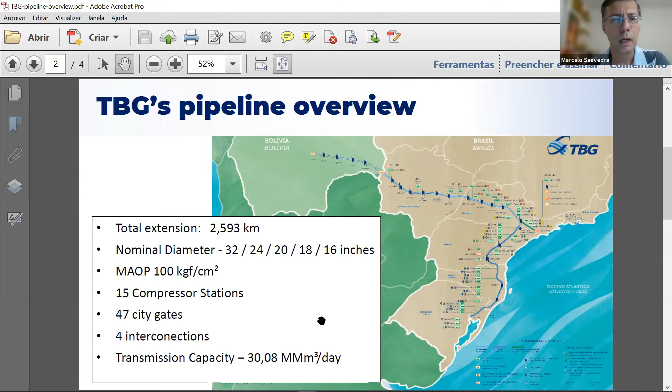And in the south, we also connect to TSB, the other pipeline operator there, and the distribution company Sulgás. Our nominal transmission capacity is around 30 million cubic meters per day. About our market area, we connect to 7 distribution companies. We serve 50% of Brazilian GDP, around 2 million residential consumers, and 20,000 commercial consumers. We also connect to 3 refineries and 4 gas-fired power plants. That's a brief overview of our company. Thank you.

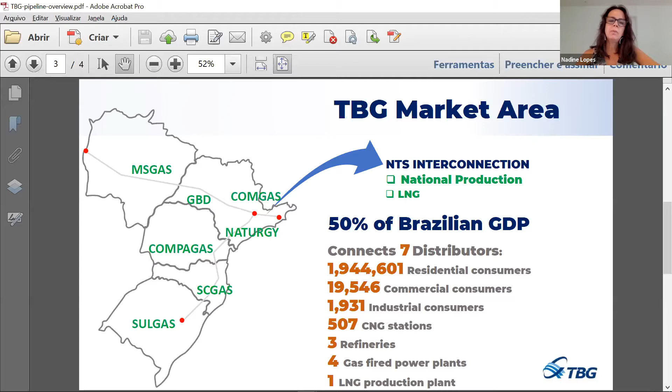It works, yes. So good afternoon to everyone, thank you for this invitation. My name is Eric Courtalon, I have been the Chief Operating Officer of TAG for a little less than a year. So just in a nutshell, TAG shareholders are Engie and CDPQ, la Caisse de dépôt et placement du Québec.

And so TAG operates 4,500 kilometers of gas transmission network, with 11 compressor stations. It's our specificity: we have approximately 1,000 kilometers in Amazonia with 2 compressor stations, and the other part of the network is along the northeast coast of Brazil until north of Rio.

And the main challenge that we are facing right now is that next year we will internalize, as NTS did, the remote operation, so that will be performed internally by TAG. We also have a lot of projects of innovation, transformation of our processes and activities on the field to improve our performance. So just to conclude, thank you for allowing this exchange, because for us it's very important in a context of, on one end, gas development in Brazil, and on the other hand, a technological revolution that allows us to live a period of exciting transformation.

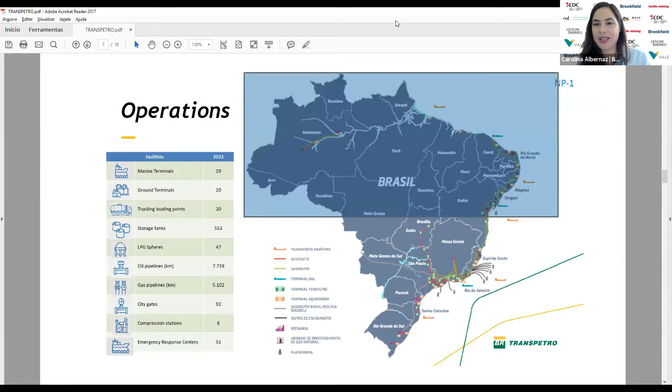Thank you, Carol. Thank you, Nadine. It's a special pleasure to be here today. Good afternoon everyone. Just a second, just let me share my presentation. Okay, all right.

My name is Marcelino, Director of Pipeline Brazil. Good afternoon everyone. On behalf of the Brazilian pipeline community, I'd like to thank all of you for being here today.

I'm talking about the Canadian companies and the Brazilian pipeline operators. My presentation today is divided into 3 parts: to talk about my present company, Pipeline Brazil, to talk a little bit about the relationship between Brazilians and Canadians, and to update all of you about the Brazilian pipeline market.

After almost 34 years working at Petrobras, I retired and founded Pipeline Brazil. Pipeline Brazil is a different company because it's an associated platform, working with young professionals and old heads. We have been developing activities, studies, trying to identify new technology in the pipeline industry, training, events, and helping startups. Pipeline Brazil is ready to cooperate with international companies wanting to invest in Brazil, or to help identify local partners to work together with international companies in Brazil.

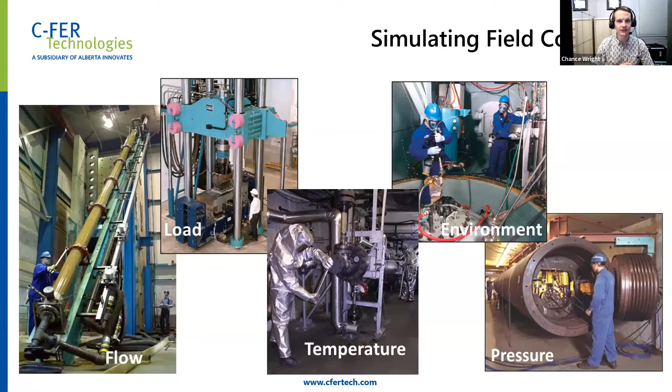Besides performing testing and related consulting work, C-FER also offers a number of different software packages. The most relevant here would be the PIRAMID Risk-Based Integrity Management software for pipelines. This software uses the latest verified probabilistic models to predict the likelihood and consequences of pipeline failure for a comprehensive suite of pipeline threats.

This allows operators to perform a number of different functions. It includes segment ranking to see which pipelines and which threats are affecting an entire network risk estimate. You can drill down to see how your risk changes over time, including the effect of maintenance actions such as defect repairs or hydro tests. You can look to see how individuals near the pipeline will be affected by failures of the pipeline, and you can get a detailed look at influencing factors into your pipeline risk by plotting a risk profile, which shows levels of risk along the pipeline route.

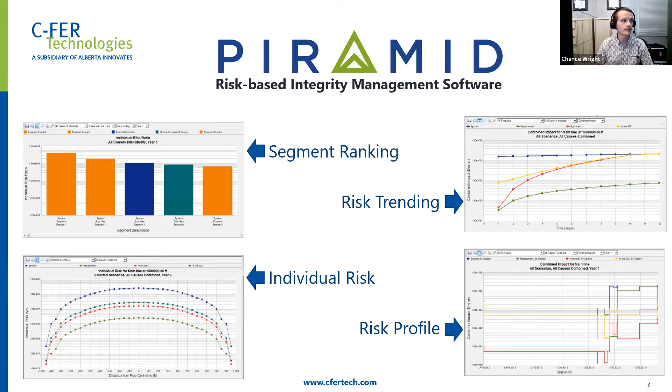Now to touch on a few of our key consulting areas related to pipelines, the first of which is defect assessment. Here, C-FER specializes in performing fully probabilistic assessments of defect safety. These assessments can include all of the different uncertainties that normally go into the defect assessment process - uncertain length, uncertain depth - performing simulations to determine the true probability of failure for each individual feature. This allows for very reliable and detailed probability of failure or remaining life calculations, which allows you to optimize the inspection or the time period required before a repair is necessary.

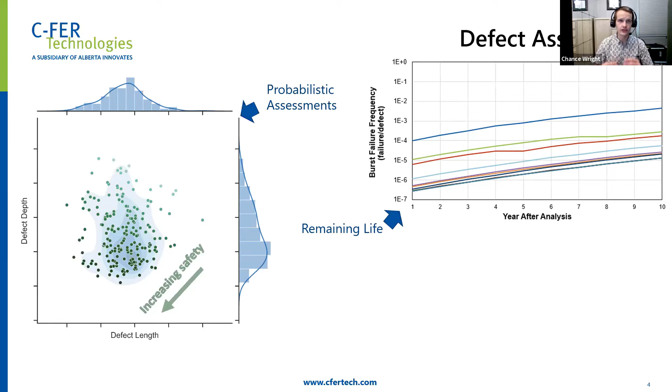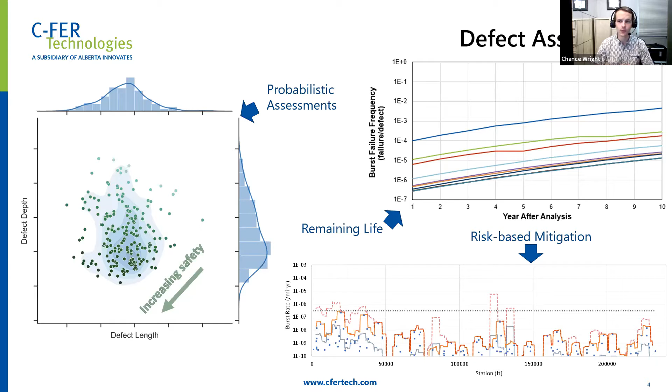All this information is used to help lead operators towards risk-based mitigation programs. This type of program allows for consistent life safety, financial, and environmental risk along pipelines, as well as between different pipelines in a network, all while optimizing the number of interventions and the cost required to perform them.

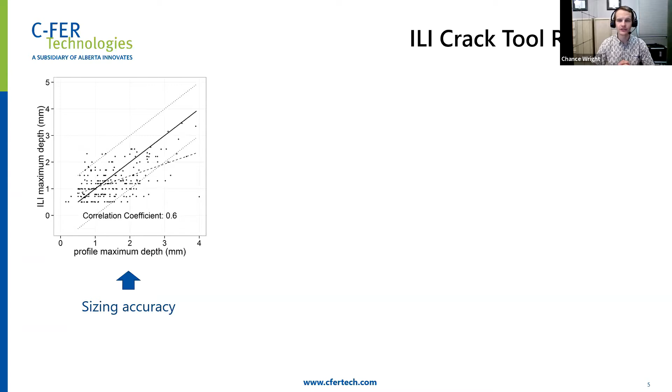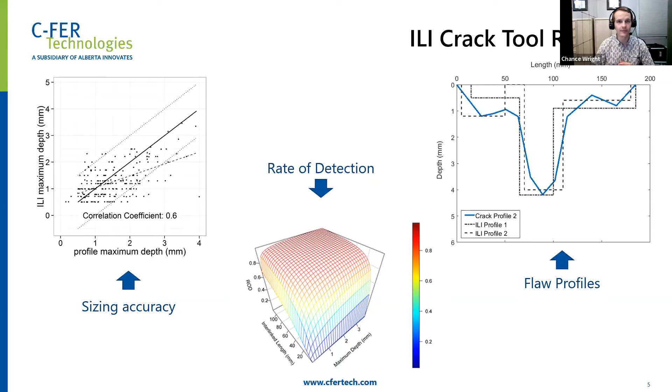Another important area of our consulting services is inline inspection tool reliability. C-FER will work with operators and vendors, or both at times, to evaluate how well these tools perform in different conditions. We are able to perform independent sizing analyses to determine how well the tool predicted the size of defect parameters for different defect categories. We can look at which parameters influence that tool's ability to detect the defect and produce rate of detection, so operators can understand which defects their inspections might be missing. Finally, for those inline inspection tools which give crack profiles, we can determine how accurate the burst pressure is when calculating using that profile, compared to using a detailed profile from an in-ditch measurement.

Lastly, I do want to touch on C-FER's leadership in managing the transition to a hydrogen economy. We've already done some consulting work to identify the gaps required to transition to hydrogen on paper, and we're also ramping up our abilities and our testing programs to suit this area as well.

This includes looking at how legacy material will perform in hydrogen-rich environments, or at least with a component of hydrogen. We're also looking to perform full pipe body burst capacity tests in hydrogen environments, as well as examining the full set of infrastructure required for hydrogen-based energy production and consumption. That includes storage wells for both hydrogen as well as CO2, and we can look at how well the casings will hold up under the conditions they will endure if put into service for this purpose.

So that is the whirlwind tour of some of the important things that C-FER is working on these days. I would like to thank you for the invitation to this, and I'm looking forward to the Q&A session afterwards.

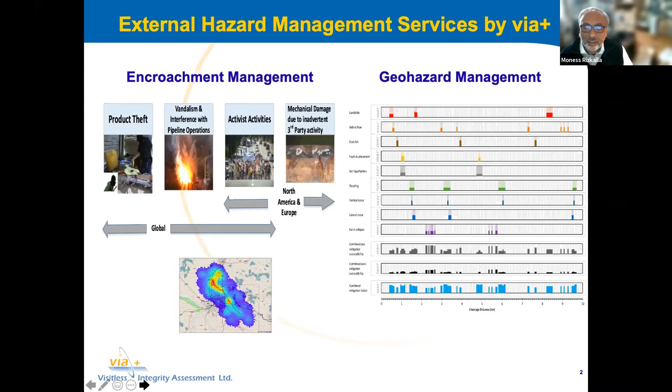And the geohazard management that we would be talking about essentially is looking at various geotechnical hazards, trying to undertake a risk-based assessment, trying to evaluate the susceptibility, which is basically the effect on the pipeline capacity, pre-mitigation, post-mitigation, and what mitigations would it take to achieve that delta.

So geohazard assessment involves identifying the various threats due to a combination of various geohazards. Several geohazards could be acting in one place, leading to various loads and deformations on the pipeline. Geohazard assessment can be used to directly manage these risks and to put them in as an input, for example, to PIRAMID, which was described earlier, or various other overall risk assessment frameworks, and to work in the spirit of various codes. CSA Canada's code is one that works well with that.

What's important here is to differentiate this and to take this beyond strictly geotechnical, geomorphological assessments. So inherent in a pipeline geohazard assessment is the capacity, the vulnerability, the resistance. And so we are looking at things, as we say, from the pipeline out, but it is really about what are the expected effects on the element at risk. We tend to mainly focus the element at risk being the pipeline.

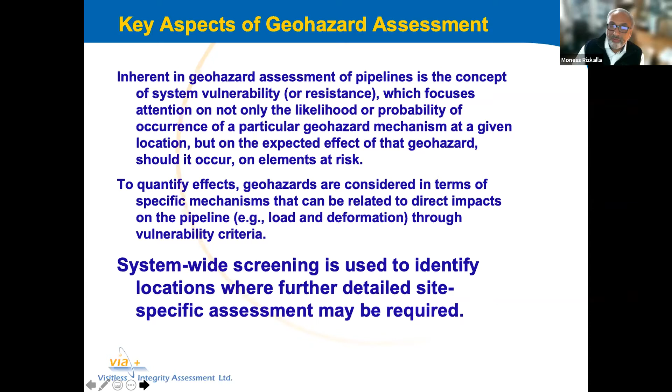So we're considering things like load, deformation. What would this particular geohazard lead to in terms of bending, in terms of torsion, in terms of mechanical effects on the pipeline? And we undertake a system-wide screening used to identify the locations where further detailed site-specific assessments may be required. So we bring data, may it be spatial data, pipeline operational data, etc., and topographic mapping, geological mapping, the wealth of monitoring data that a pipeline company operator may have had, integrate all these to identify what is at play where, and in some cases, what distinct geohazard mechanisms together are working.

I'm not quite sure who's driving here.

You may be driving. So the output ends up being an example like that. We could look at landslides, debris flow, rock falls, faults, and liquefaction if it's an area that is prone to seismic activity. Definitely flooding and vertical scour and lateral scour, the areas associated with rivers.

We divide those, and what you will see at various bars is a light color and a dark color. The light color indicates where the hazard mechanism is at play. So for example, if you look at landslides, the locations here suggest there is a slope of such and such a width, at such and such a location, that is unstable.

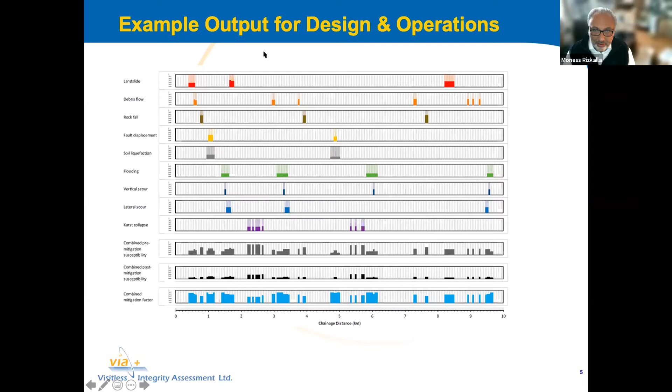However, that instability in itself does not necessarily manifest into equal impacts on the pipeline. The impacts on the pipeline, therefore the susceptibility on the pipeline, is what's identified in the darker colors for the respective hazards. So it's necessary, but not sufficient, to simply map the geological, geotechnical, hydrotechnical, and seismic hazards.

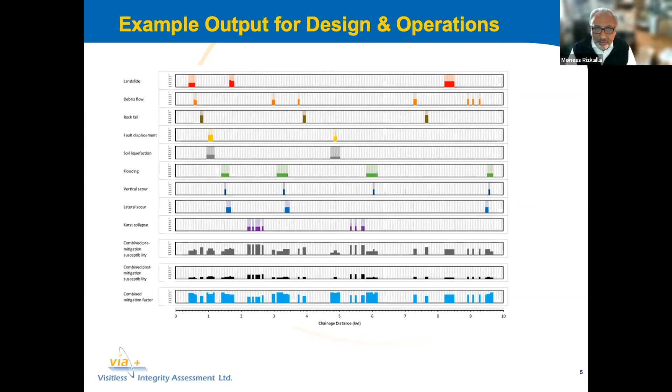Rather, we need to identify these and identify the effect on the pipelines. And then, where they are possibly overlapping, we need to integrate all those together and come up with a pre-mitigation susceptibility, basically the third row from the bottom.

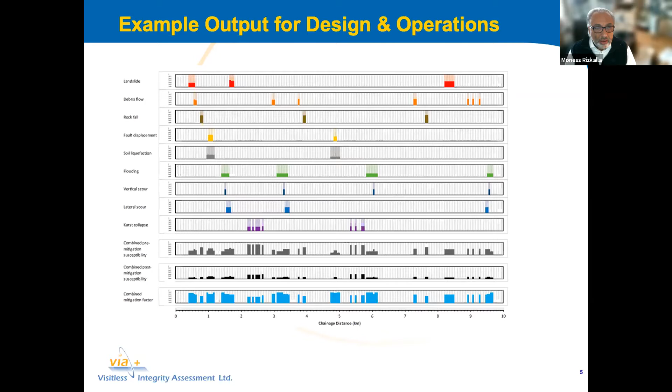And then we decide what we are going to do there in terms of mitigation. We could be doing this evaluation during the design stage or during operations. So we could increase the wall thickness, increase the depth of cover, introduce different stabilizations, or change the pipe grade, etc. Ultimately, we move from a pre-mitigation susceptibility to a post-mitigation susceptibility.

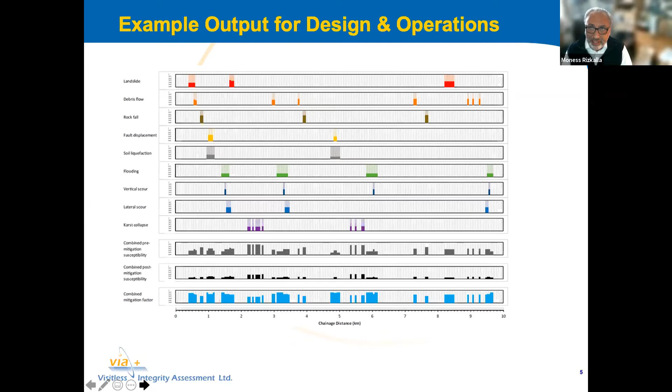That ends up being kind of the failure probability that gets integrated with consequences in a framework, like PIRAMID or someone else. And we keep track of all the mitigations we've done. Again, that could be applied at the juncture of designing a new project or during operations.

Going down to the next slide, what is the advantage of doing this? I am personally a geotechnical engineer. There are a lot of geotechnical engineers, and geotechnical engineering is a discipline that needs a fair bit of qualified professional or expert judgment.

That's true, but I think the advantage of this, and why leading operators have embraced it, is because it introduces a systematization that addresses the heightened expectations by regulators, internal and external stakeholders. Internal stakeholders would like a more controlled, predictive kind of timeline assessment, so we could predict when to plan things to avoid negative consequences—financial, environmental, etc.—due to a loss of containment event. This is becoming now a best management practice.

It is spelled out in several codes. In fairness, all the codes, whether American, Canadian, European, etc., will not specify how to do it—whether it needs to be quantitative, semi-quantitative, or qualitative. But there is an expectation to introduce some discipline and systematic approach to this. This will demonstrate due diligence and allow an analysis of the pipeline's performance over time—how much we are spending to maintain a sustained level of integrity.

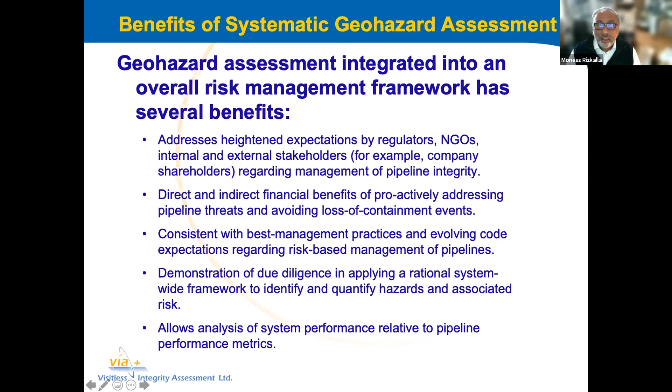And from there, it could be design, or from geohazard assessment, it could be integrity management planning. I realize this is going perhaps a little too quickly, but it just shows how the same exercise, beginning with data and applying a disciplined approach, could either support the integrity management of operating pipelines and/or the design of new facilities.

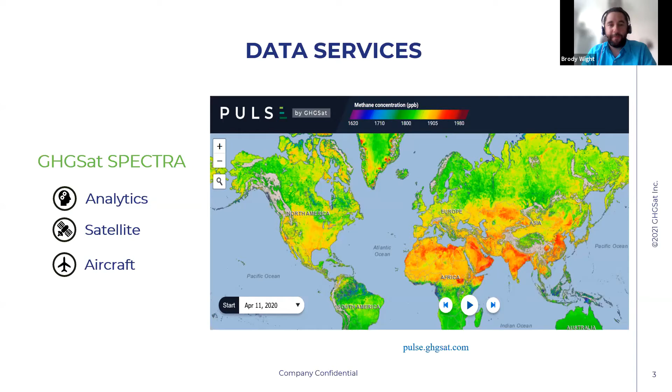So what do we provide? Essentially, data services. We have our own analytics that we've derived, satellites that we own and operate, as well as our own aircraft that are well suited to monitoring large assets such as transmission pipelines. We also have a publicly available map that I'm showing here, but this is just a brief outline of what I'm going to talk about, starting with the analytics. I'd encourage you to check out pulse.ghgsat.com to see some of the data we've made public — a teaser for some of our analytics capabilities.

So what do those look like? What I've got on screen is a map showing the Americas. You can see we've segmented the world into a variety of zones, as we call them. We provide analytics at a high level of these zones, looking at methane concentrations and trending them in those areas, using a variety of data sources, but largely based on public data.

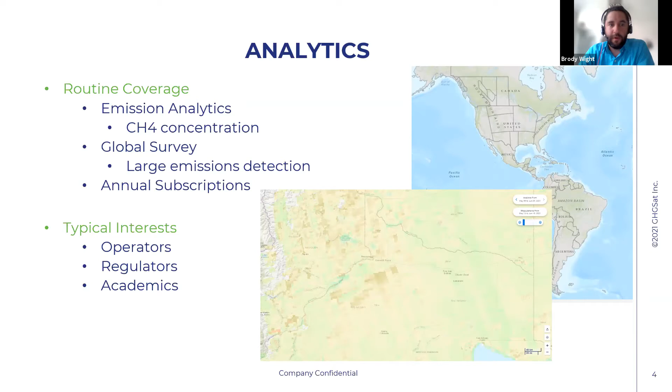We also offer analytics in the form of what we call a global survey, looking for very large emissions, again using public data sources, provided as a subscription service. We have interest and contracts with all walks of those interested in methane emissions. The example shown here, with some greens and oranges, is actually a screenshot of our higher resolution methane analytics, provided on a roughly 2-kilometer scale and updated weekly. The global survey is similarly provided on a frequent basis, acting as a catch-all for large emissions we see routinely around the world.

Complementary to the analytics offering, as our name implies, being GHGSat, we own and operate our own satellites. Our satellites are designed to be relatively small and easy to launch, and they're focused exclusively on methane. The key unique capability we have that other satellite sources may not provide is the resolution that allows for detection of emissions at the facility level — compressor stations, valving, that type of thing along the system. The contracts we're operating on today typically look at these surface pieces of infrastructure rather than the linear pipeline itself. We capture an image roughly 12 by 12 kilometers in field of view, and with the 2 satellites we have in operation today, we're able to revisit up to weekly.

We've already started on and are contracted for the launch of our next 3 satellites in mid-2022, and then early in 2023 we'll be launching another 5, with a goal of being able to provide daily coverage of any of the assets we might be monitoring for our customers.

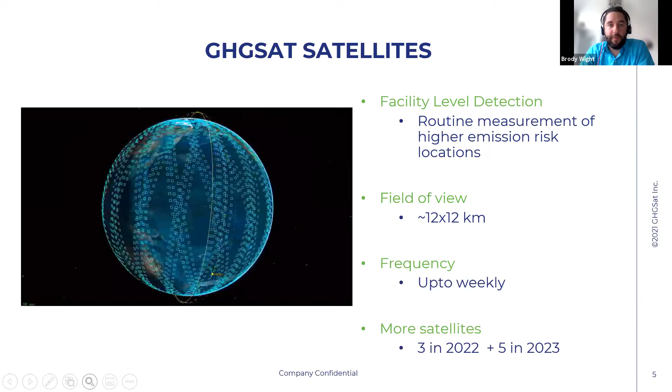A quick example of what a GHGSat data product looks like: here you see an observation we've taken, clearly identifying a source of emission at the center of that plume. We refer to this as our concentration map, and you can see that 30-meter spatial resolution that is unique to GHGSat today. We're the only operator of a satellite with this kind of spatial resolution for methane globally, and we're expanding our fleet rapidly.

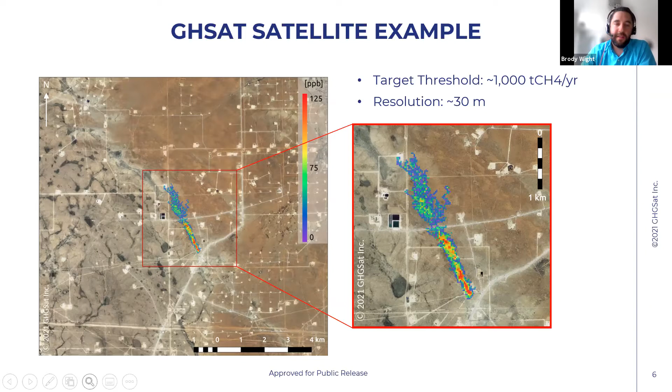Happy to answer any questions about how this works a little later on, but the basic premise is spectroscopy. I'll just point out that indeed the measurement is in parts per billion, but it is averaged over the entire atmosphere above each pixel, which is why the sensitivity needs to be so high.

We can cover around 750 kilometers a day with our aircraft, and we offer that with sub-meter pixel resolution and a detection threshold in the low tens of kilograms per hour.

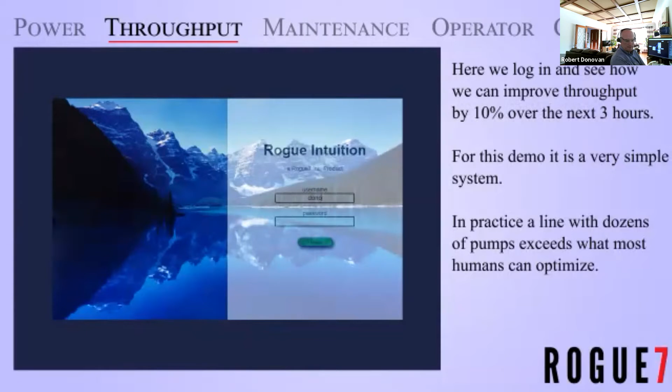Machine learning for amazing industrial optimization. Rogue Intuition has many optimization modules, including power reduction, throughput, predictive maintenance, operator performance, and cost optimization. Optimize power usage while meeting all constraints such as throughput and pressure. Optimize throughput while meeting all constraints such as pressure. So we'll log into Rogue Intuition so we can see how the machine learning is able to predict the future. Here we have a model of the system that's able to make predictions given certain set points. Normally it would do the exploration of the set points, but we'll do this manually and see what kind of optimization we can get. Normally it would simply give us a set point - and there we go, a 10% increase in flow, which would be pretty valuable.

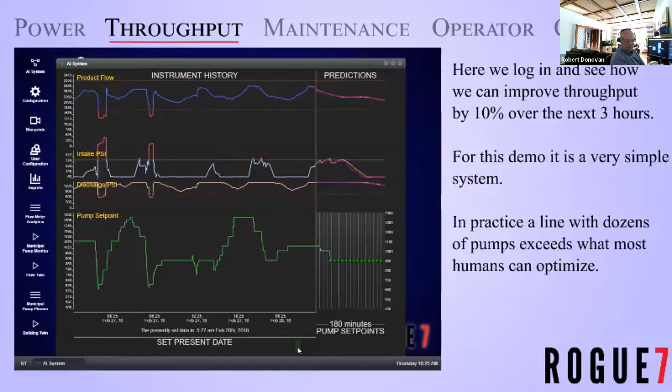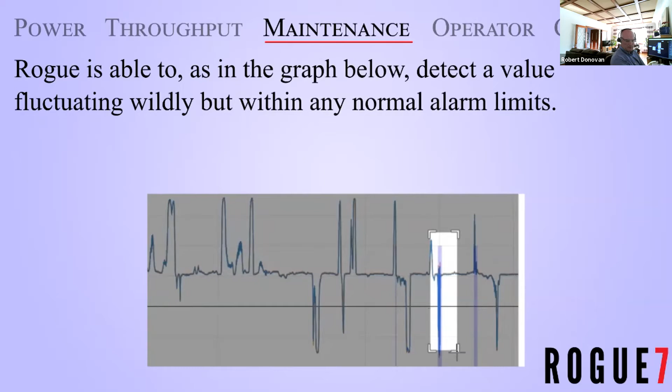Rogue Intuition operates like thousands of full-time operators watching for when instrumentation isn't making sense. This is beyond simple SCADA high-low alarms like the graph below. Rogue is able to, as in the graph below, detect a value fluctuating wildly but within any normal alarm limits. Catching potentially serious problems missed by a typical SCADA system can help prevent unexpected shutdowns, failures, or other serious costly issues. Rogue Intuition is a game changer with the power to analyze thousands of instruments and present actionable information to operators and managers in a simplified format. Rogue has experience building modules for failures in a wide variety of sensors and devices, including ultrasonic flow meters.

Simple is a critical part of our design philosophy. We provide simple, actionable suggestions to make junior operators more like senior operators, and senior operators even better.

System-wide cost optimization involves taking into consideration many factors such as DRA, pressure constraints, power prices, financial, weather, etc., so that demand predictions, logistics, and scheduling can be optimized. When optimizing, Rogue can include interesting concepts such as asset wear, market considerations, and other factors that impact the bottom line of the entire organization.

You can demand our product delivers an ongoing business case showing solid ROI. Here's how we meet the 5 musts of a machine learning optimization system.

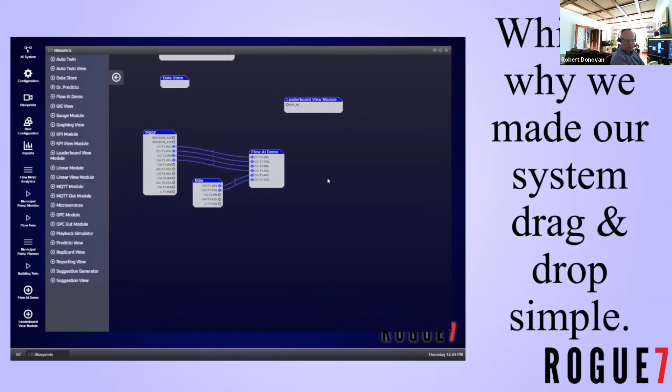This is an actual install of a pre-configured system. Our system is happy on Windows, Linux, and it being the 21st century, the cloud. Our employees have decades of experience building and installing systems such as SCADA, which is why we made our system drag and drop simple. Drag and drop simple includes our machine learning modules configuration.

What you're seeing is the configuration of very advanced machine learning modules through very simple drag and drop. This builds, trains, and deploys the modules.

We understand the regulatory, corporate, and server room needs of oil and gas customers. We have built our system to meet these needs.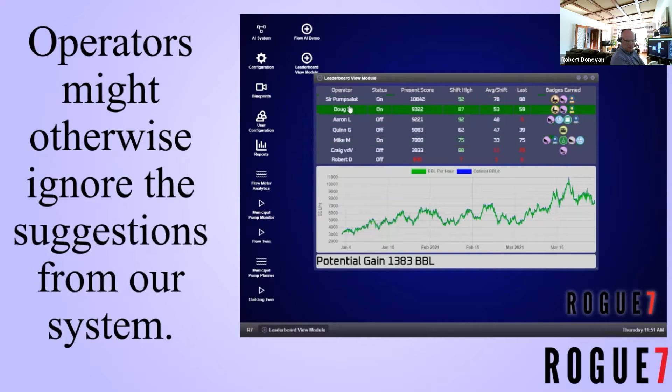This is the final output of our gamification system. It allows operators and managers to clearly see operator performance. Operators might otherwise ignore the suggestions from our system. Our system will calculate comparison between what was done versus what could have been done.

Our system can be distributed across multiple on-premises servers, and if one goes down, the others will redistribute the load with zero intervention, or we can put it on the cloud.

Security is another key aspect of building mission-critical systems. Our system follows the best and most modern security practices possible.

One HMI goal is to drastically reduce information overload of both operators and managers. We present simple, actionable suggestions as clearly as is possible.

Our subscription model means we prove every month the ROI you expect from Rogue Intuition. What sets Rogue Intuition apart is that it is a product that just works. With minimal configuration, it is able to ingest huge amounts of data, learn and build models from that data, and begin providing valuable, actionable suggestions.

The value of these suggestions can be extreme. A 5% optimization of throughput, power, or even DRA can be worth millions every year. A simple way to understand the potential is to look at the difference between your junior and senior operators' performance.

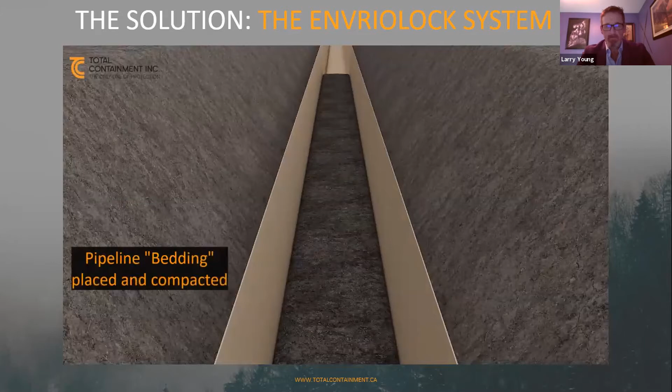So what's happening here is the trench is dug and our containment liner goes in the trench. This is on a new system, a new pipeline. Cathodic protection is inside. Leak detection gets put into the bedding. It's all compacted and the leak detection goes in on top of the bedding itself. Then the pipeline is installed, put on top, all QC is done above ground. Then the system is completely covered with backfill and the sides are closed up on the liner.

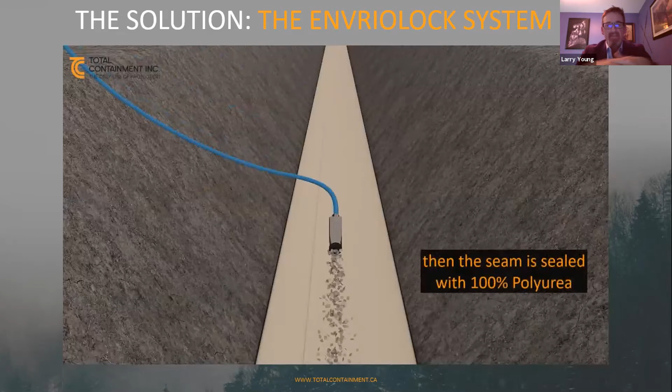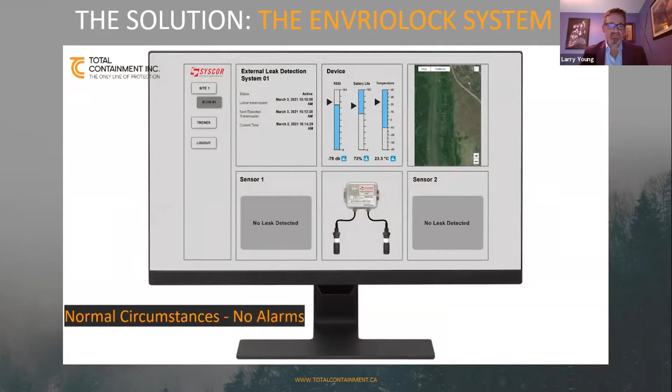But inside this environment, when a leak takes place, it has nowhere to go. So it's going to fill up that defined area inside the containment system. And a leak doesn't have the pressure and the power to get through that containment system. We tested the system to show that it could resist 2,000 PSI at a 4 millimeter diameter orifice.

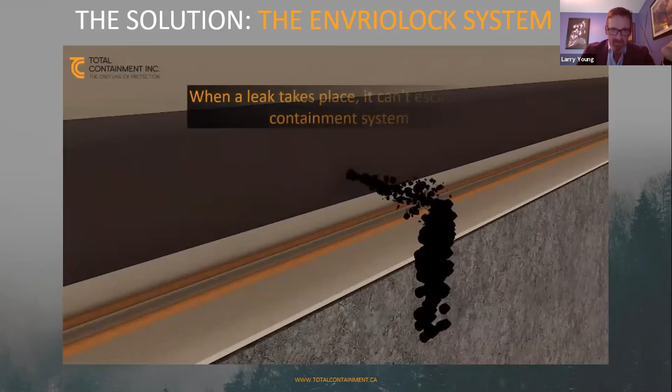Leak detection is very effective in this environment. As a leak takes place, it spills out into the containment system and we can detect that through vibration or through vapor detection. Our leak detection system that we've chosen is the Syscor system, also another Canadian company, and it has a multitude of ways to detect leaks and activity around the pipeline.

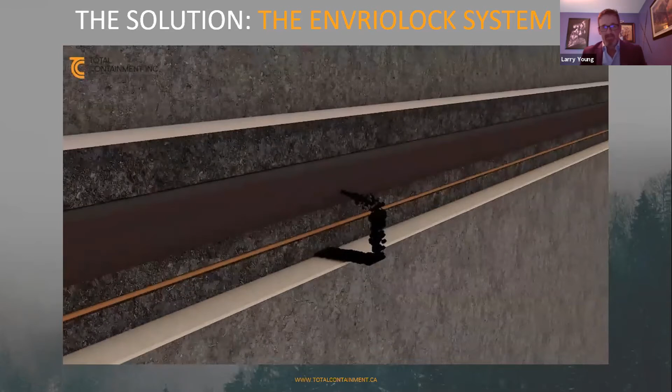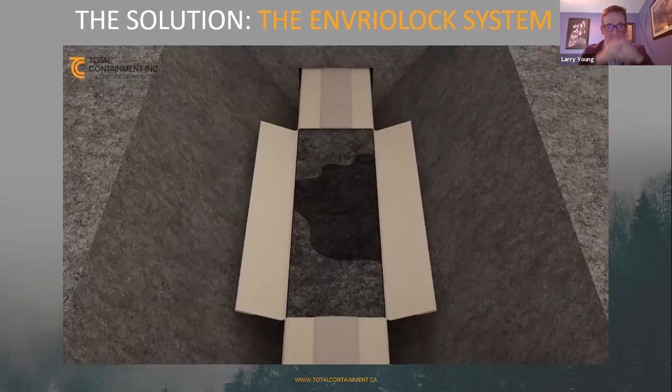So alarms go off, very simple, shut off flow. The leak is contained inside the containment system, nothing gets out. Your guys go to the site, open up the area, open up the containment system, remove the contaminated soil and oil or gas, whichever—we'll get into the gas thing a little bit later. Remove the oil, repair the pipe, and then it's just a reverse of the installation for the removal of the contaminated soil that's inside the containment system.

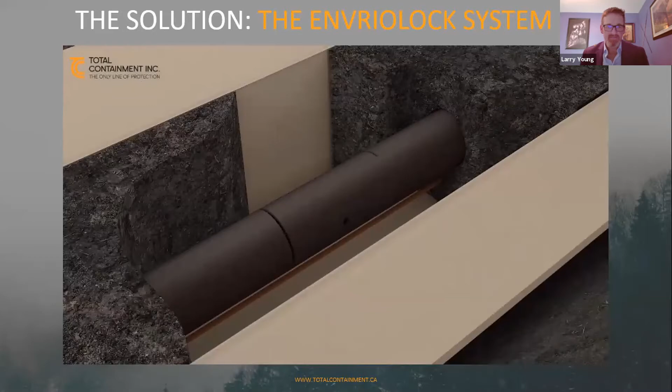And I'll let this catch up here as I'm getting a bit ahead of myself. I always get excited when I discuss this. Repairs are made, leak detection, cathodic protection goes back in, backfill is replaced, and then the system is folded over itself again and resealed. This is a sprayed product. It's made out of polyurea, which is a very strong material, very high tensile strength, and it's going to last for 75 to 100 years maintenance free in that environment, unless there's a strike from equipment.

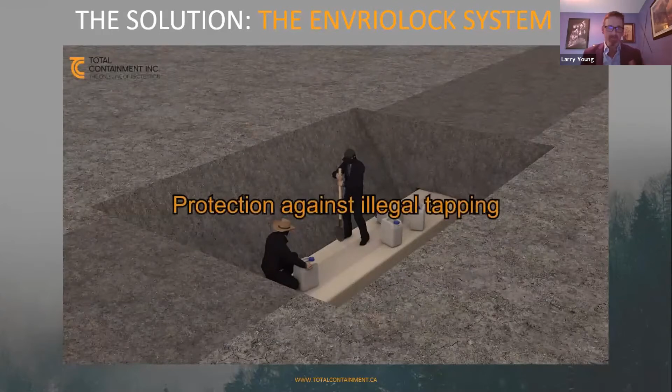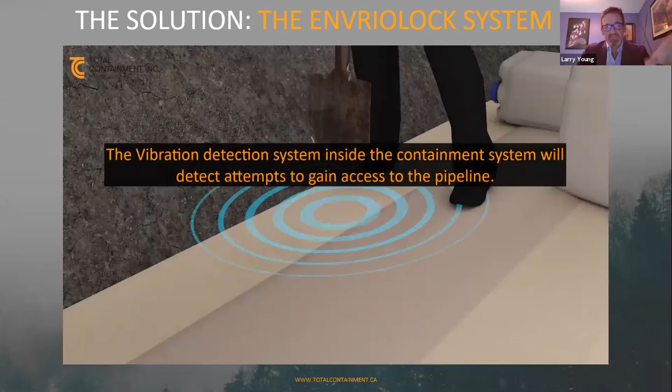And here's a big one here. It's a little comical, but just to give you the idea, we can detect when they're digging above the pipeline. And this system will keep them out for a period of time. So once that alarm goes off, we're able to send out—we can use drones, we can use people going out to the site. But the key to this is we're aware of the attack before they even get to the pipeline. So the system is a physical barrier that's going to help keep these people away from your pipelines.

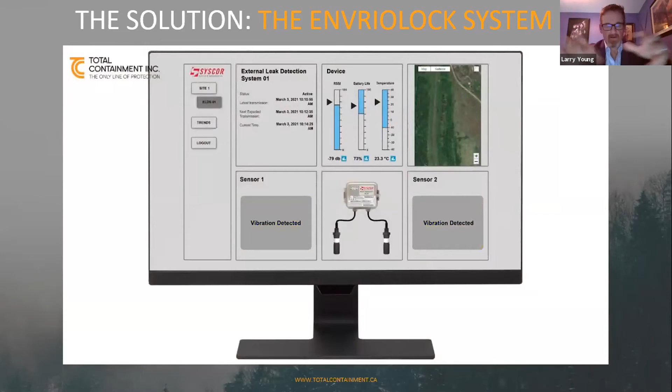And should a leak happen, or if they get access to the pipeline, the vast majority of that spilled or leaked product is going to remain inside the containment system. And that's one of the exciting things about this. It's completely resealable. It's not an easy thing to penetrate.

Believe me, polyurea is very similar to what's sprayed in the back of a truck bed, and it has just insane properties. Hydrocarbons as a chemical, they're not going to break down this material. Water has zero impact on polyurea, and it's just a spray onto a geotextile fabric. The geotextile fabric kind of similarly acts like rebar in concrete, but it's just a substrate, just something to put the polyurea to. Polyurea has been in the industry for secondary containment for many, many years, and the properties of polyurea are well known.

And okay, hit that one again.

So this is the Envirolock 2 system. It's an upgrade from Envirolock 1, and this one is for existing pipeline. Creating and installing the Envirolock 1 on an existing pipeline has some challenges, but it's certainly doable on an integrity dig kind of application. This is for high consequence areas.

This is for near water, under rivers, crossings, things like that. Certainly it can be installed on an entire pipeline, no problem, but it's made for those high consequence areas where if a leak happened, it's much more of an impact. And this system is going to last for a very long time in the ground.

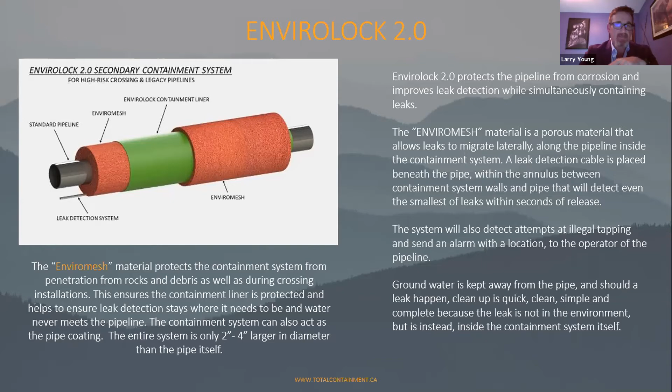So it's forced to move through that annulus inside the containment system. That system can be any size—we created a minimum size for that because it acts as a storage space. Now on a gas pipeline, the same application applies, except when it's detected, the flow is shut off, and before excavation even takes place, we can flare off the gases contained inside the containment system. So when excavation happens, it's very safe and there's no risk of explosion.

This is just another side view of the system. It's good for existing or new pipelines. It's an elastomeric properties based system. Expected life of it is 75 plus years—that's the entire life of a pipeline.

It can act as the replacement to the coating as well. So the sections of pipe on a new install, we can take and install this system in our shop and then send it out to site to be installed fully, and we're just doing the joints on site. It will help with a lot of the false alarm problems that new technology tends to have because of the influence around the environment.

The leak site is identified within 10 feet. Each sensor—and we have an array of sensors in this leak detection cable—can detect vibration, vapor, and H2O. So if the system is struck by an excavator and water starts to get inside, we will detect that water as well to let you know something's going on with your pipeline. We can also detect methane and natural gas leaks. It's a very effective system for new or existing pipelines.

One of the biggest problems in South America and Brazil, those kinds of areas, is the illegal tapping aspect. We're in contact with our companies in Nigeria as well, as they have another massive problem with that kind of issue. Our system is able to keep people away from the pipe long enough to get authorities to site to put an end to the attack.

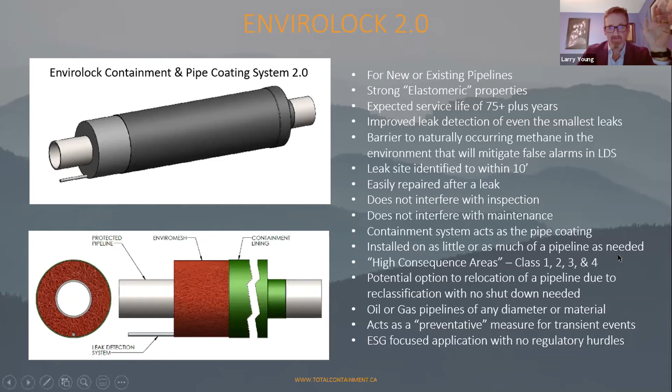Inside the leak detection cable that runs inside our containment system, there's 3 arrays every 10 meters. So the system is able to detect 3 different things at once. And it's operated by lithium battery or solar.

We just bury the access and bury the battery above the pipeline. We can hide it. Solar tends to be knocked down in places where there's illegal tapping. So there's a couple of solutions in that regard.

But we're able to detect inclination, temperature changes, vibrations, fluid levels, which is water inside the containment system, and hydrocarbons. So it's really a full system, and it's in-house monitoring, comes with its own monitoring software, very effective stuff.

We spent 2 years at C-FER with the development of our system, and really they were the gatekeeper for getting an idea like this through. You couldn't do any better than reaching out to C-FER when it comes to integrity issues.

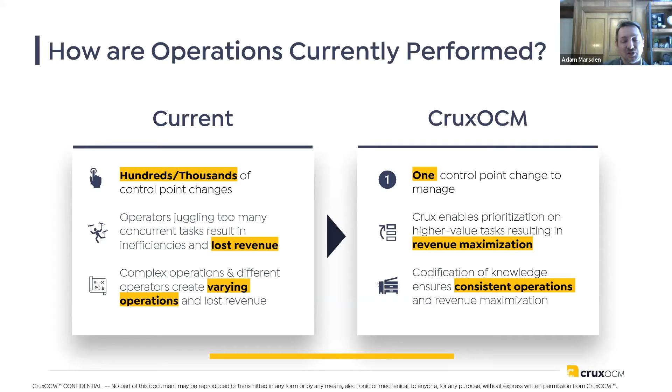So segmentation wise, we're primarily going to focus on pipelines because that's what a lot of the people on the call are talking about. But we have different technologies that range everywhere from upstream and downstream. Of course, the primary focus for you folks is the pipeline sector.

We also have optimization algorithms, standard APC, that sort of stuff. And all of those get nested together into what we call the automation solution layer. So this is the one button press automation of startup of a pipeline, startup of an LNG facility, startup of your gathering systems, etc., or shutting them down, as well as maintaining them within steady state.

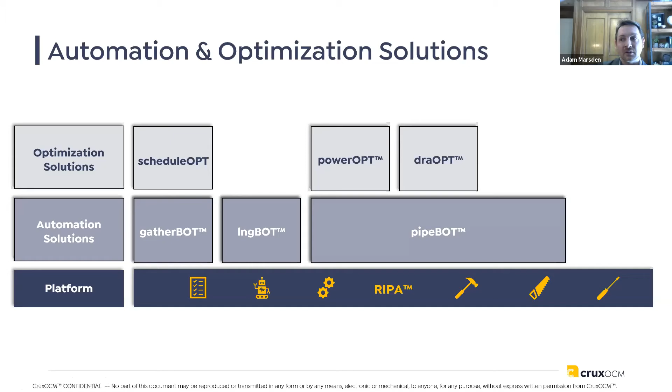On top of that, we have optimization add-ons or algorithms as well. In the pipeline space, it's very important that we manage the pipeline with the lowest amount of cost possible. So we want to make sure that you're managing your power costs, your DRA costs, etc. We want to put through the appropriate amount of product within the appropriate time intervals based off of the power and DRA costs. And all of this, once again, is done automatically without any control operator intervention.

So just to end here, the four main pillars to the rationale as to why Crux exists across the Americas. We have many different clients, and primarily the impetus of Crux was all around reduction in human factors. So it was really to take the control operators, all those mundane button clicks, set point changes, etc. that they're doing each and every day, and reduce and distill that down as much as possible.

That was really the reason we were founded and started. From there, we've been very fortunate because we found a lot of other derivative benefits that companies like as well. So you get consistent operations each and every time. We can start up your pipelines or whatever your industrial asset is much faster. We can perform swings much faster, which means you have more throughput.

We also, because we're software, we're sending commands more consistently and more frequently, which means that your pressure and flow rate variations decline dramatically, which has a direct correlation to higher asset lifespan or asset integrity. And of course, the last thing is with regard to the environment. Depending on the specific bot that's employed, we can reduce emissions and those environmental impacts as well. So that's at a really high level.